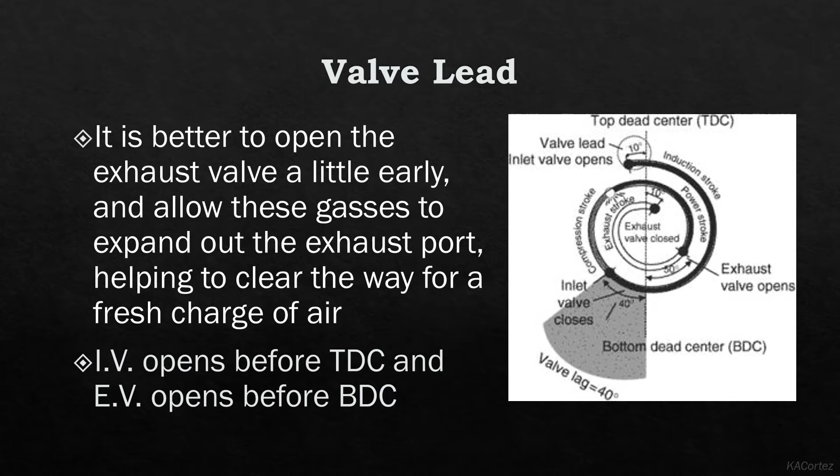The valve lag. Valve lag is the number of degrees of crankshaft rotation after a piston passes the top or bottom center of its stroke, at which the intake or exhaust valve opens or closes. This delay, or the valve lag, enables the momentum of the mixture to add to the weight of the charge, or the momentum of outgoing exhaust gases to pull more exhaust from the cylinder. Therefore, valve lag helps to increase the volumetric efficiency.

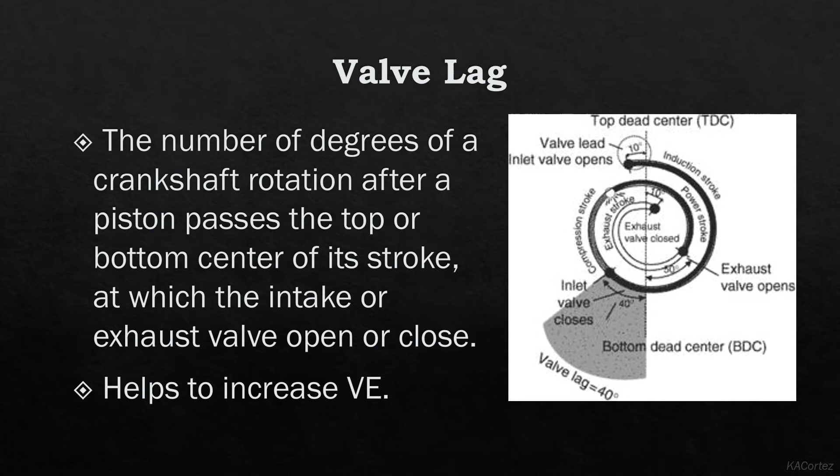Valve overlap. As the engine cycles, there is a period when both the intake and exhaust valves are open at the same time. This timing is known as overlap. Think of this as the exhaust and intake cycles overlapping each other. The valves are timed so the intake valve opens slightly before the piston reaches top dead center on the exhaust stroke. Likewise, the exhaust valve is timed to close just after the piston starts down on the intake stroke. So again, valve overlap occurs when the intake valve and the exhaust valve overlap each other at the same time.

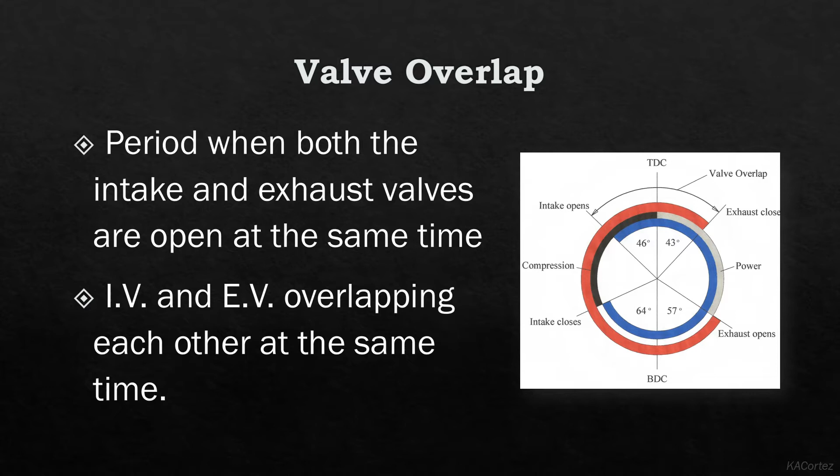The objective of the overlap is for the exhaust gas, which is already running down the exhaust pipe, to create an effect like a siphon and pull a fresh mixture into the combustion chamber. Otherwise, a small amount of burned gases would remain in the combustion chamber and dilute the incoming mixture on the intake stroke. This valve timing is a product of the cam's duration and separation specs.

Firing order. This represents the sequence in which the ignition event occurs in different cylinders. Every engine is designed with a specific firing order to maintain balance and to reduce vibration.

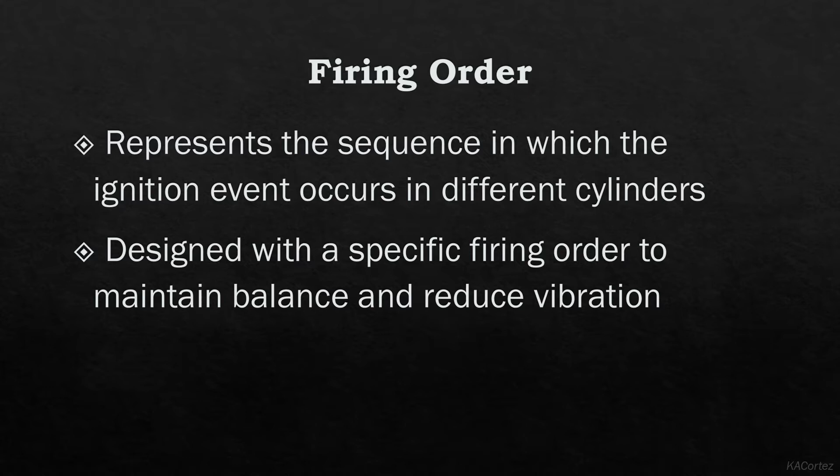For radial engines, the firing order is 1-3-5-2-4. By the way, this is for a 5-cylinder radial engine. For a 7-cylinder, it's 1-3-5-7-2-4-6. And for a 9-cylinder radial engine, it's 1-3-5-7-9-2-4-6-8.

For the inline engine, it's 1-2-3 for a 3-cylinder inline engine, and 1-3-4-2 for a 4-cylinder inline engine. And 1-5-3-6-2-4 for the 6-cylinder inline engine.

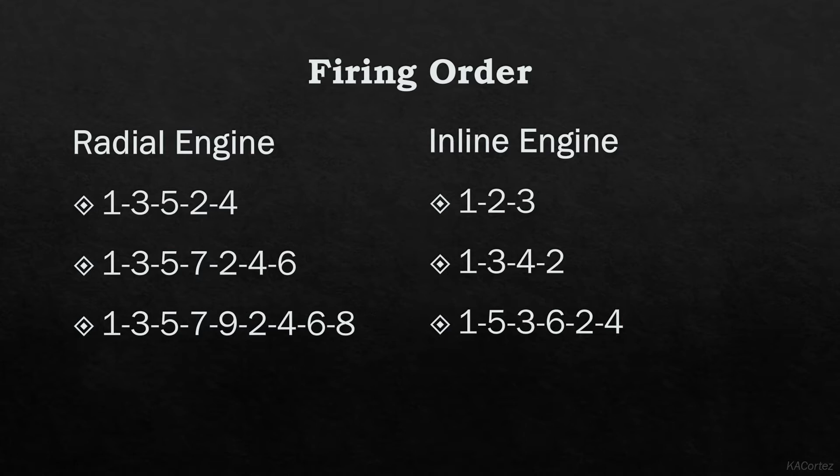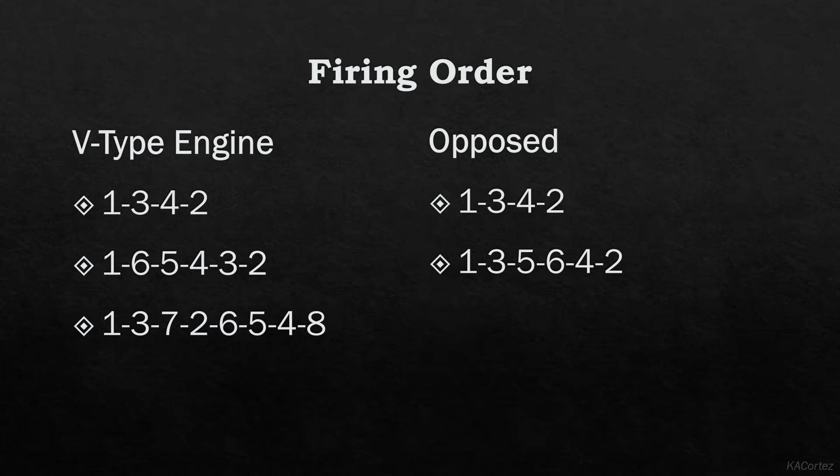For the V-type engine, that's 1-3-4-2 for a 4-cylinder V-type engine. And 1-3-7-2-6-5-4-8 for an 8-cylinder V-type engine. Last is the opposed. For an opposed engine, the firing order is 1-3-4-2 for a 4-cylinder, or 1-3-5-6-4-2 for the 6-cylinder opposed engine.

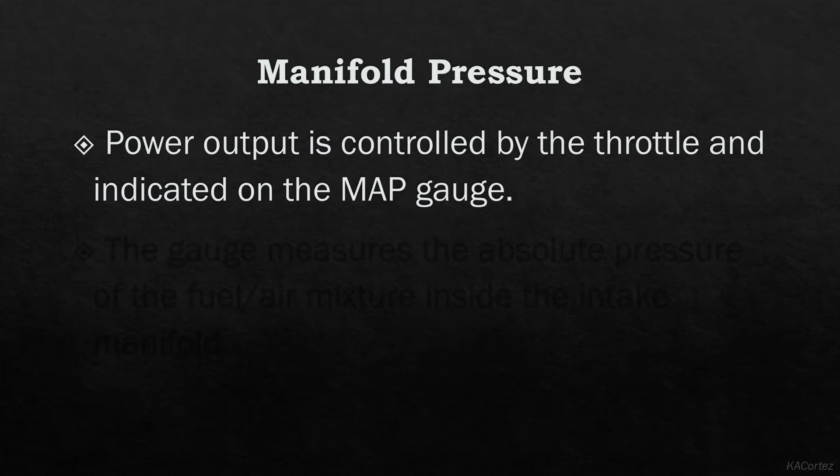Manifold pressure. Power output is controlled by the throttle and it is indicated in the manifold pressure gauge. The gauge measures the absolute pressure of the fuel-air mixture inside the intake manifold. An increase in the throttle setting draws in more fuel-air flowing to the engine, and the manifold pressure increases. It is also important to remember that a given RPM should not exceed its manifold pressure.

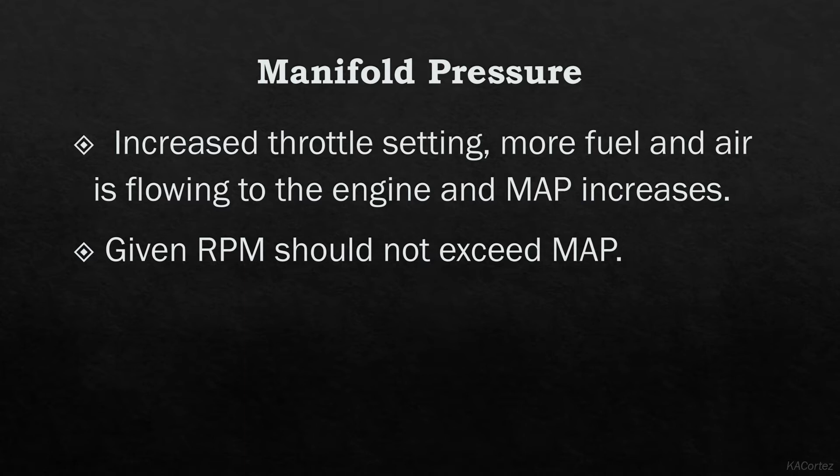Fuel-air ratio. For a rich mixture, the ratio is 8 parts of air to 1 part of fuel. The lean mixture is 20 to 1. And the stoichiometric ratio, or the ideal ratio, is 15 to 1.

Also, fuel-air mixture is controlled by the mixture knob or lever.

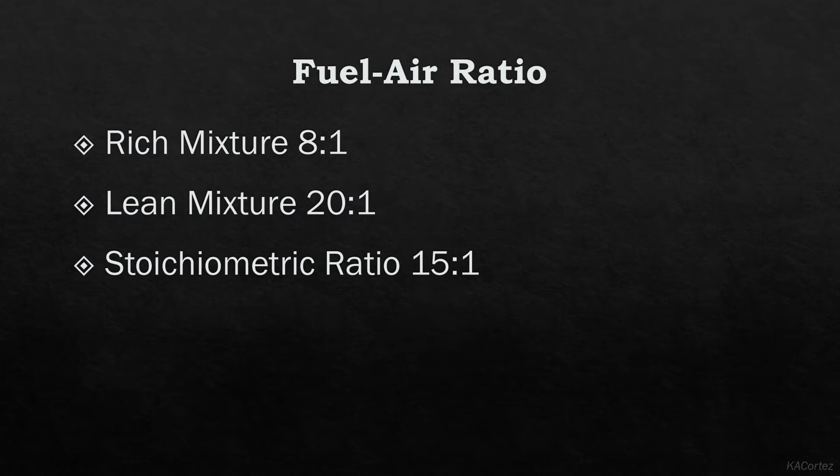Here are some fuel-related problems. Fuel tanks contain moisture that condenses when the outside air temperature cools. As a solution, empty the space inside the fuel tanks that contains this moisture, or refill the fuel tanks to full levels at the end of each day. Condensation occurs when the outside air temperature cools, so this happens at night when the air is much cooler than the land.

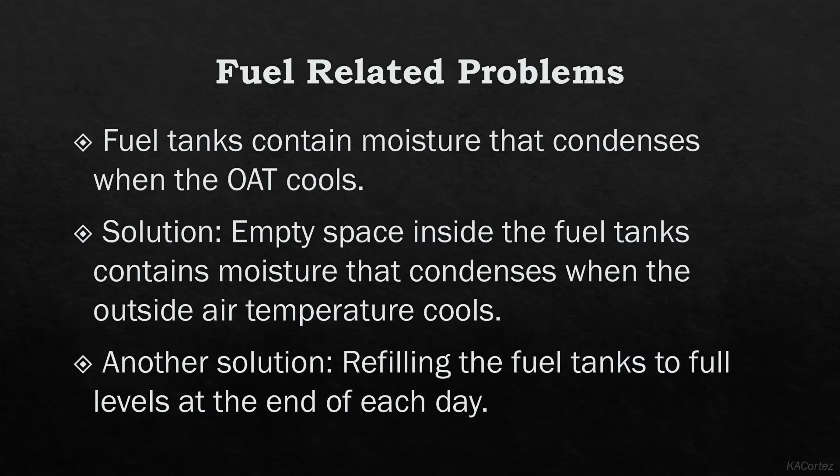Another fuel-related problem is pre-ignition. This is caused by the premature burning of the residual hot spot in the cylinder, which is often created by a small carbon deposit on the spark plug. This is also caused by using a lower than prescribed octane rating. So this is pre-ignition.

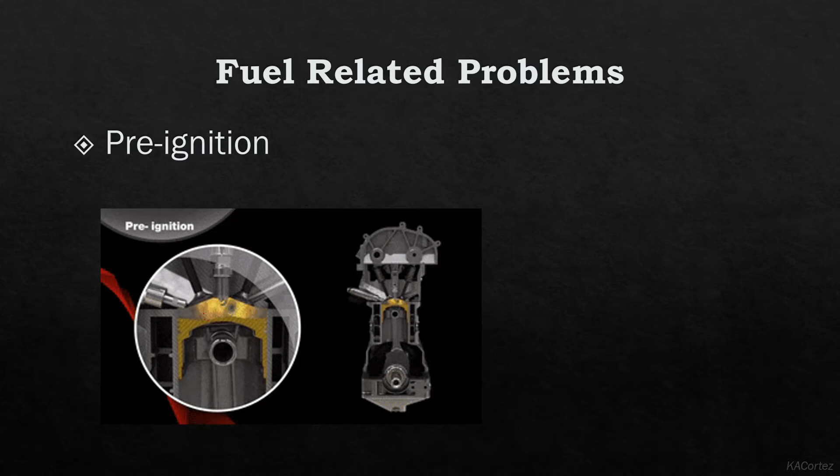Detonation is the uncontrolled explosive ignition of the fuel-air mixture within the cylinder's combustion chamber. Here are some causes of detonation: the use of lower fuel grade than that specified by the aircraft manufacturer, and operation of the engine with extremely high manifold pressures in conjunction with low RPM.

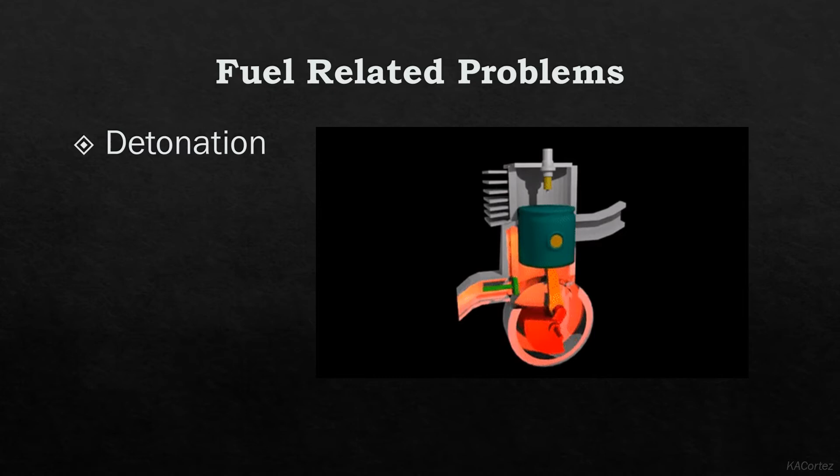Also, operation of the engine at high power settings with an excessively lean mixture. And last is maintaining extended ground operations or steep climbs in which cylinder cooling is reduced.

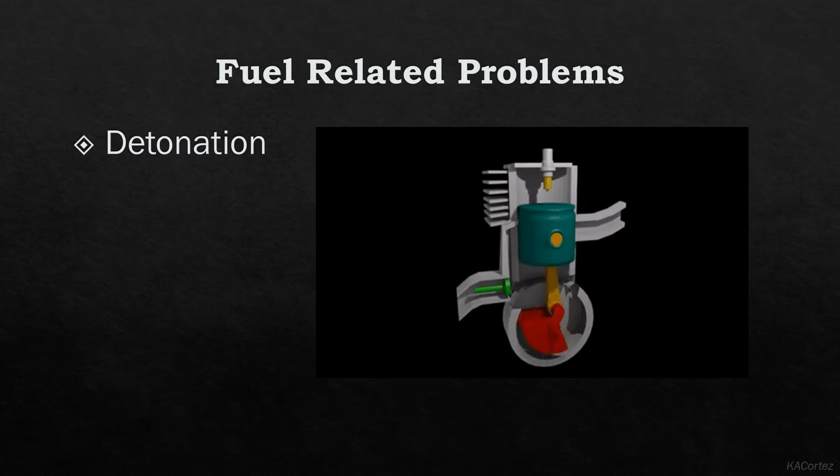How do we avoid detonation? Keep the cowl flaps open on the ground. Use the proper grade of fuel as prescribed by the OEM. Use a rich fuel setting during takeoff and initial climb. And avoid high power and steep climbs.

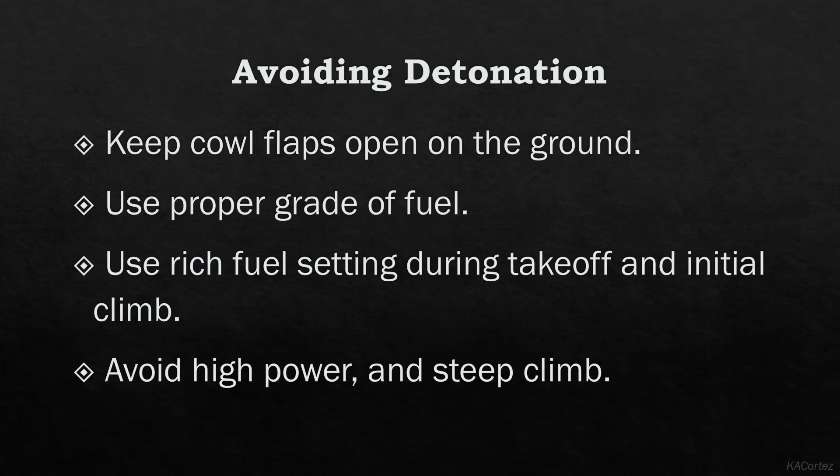Usually, mixture is leaned when the density of the air is lesser, or gets thinner. Pilots would start leaning the mixture at 3,000 feet.

So here are some benefits of a properly leaned mixture. It gives better engine performance. With the right amount of fuel-air mixture, the engine will produce the right amount of torque needed for a propeller to be efficient during flight. And last is fuel efficiency.

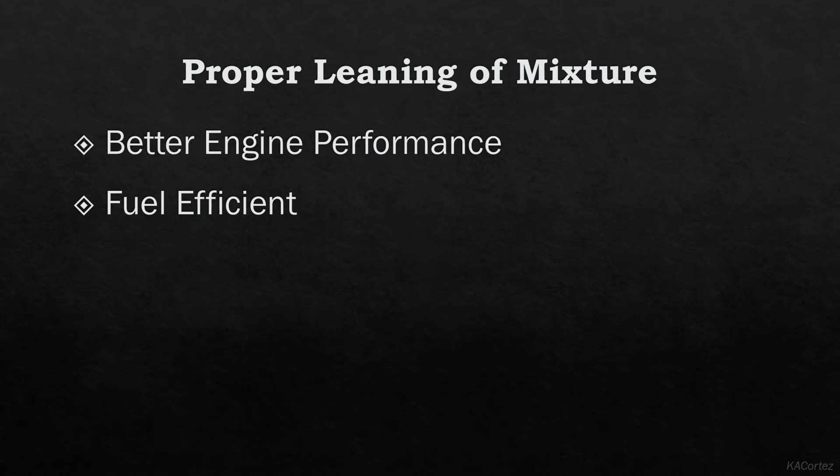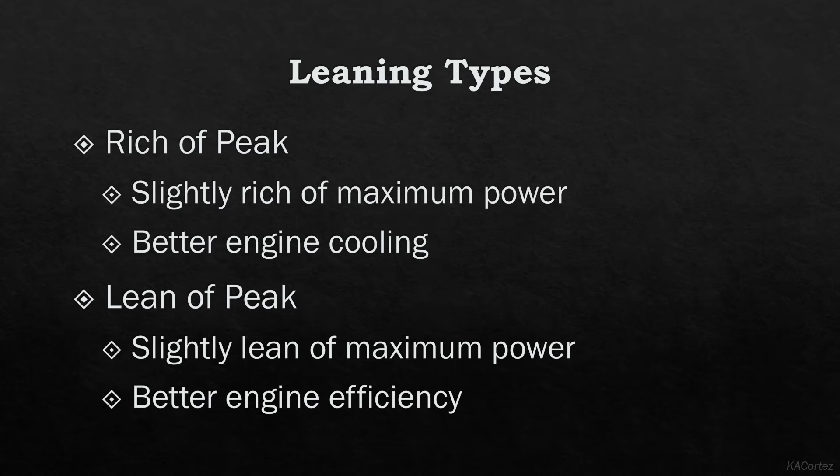Leaning types: there are two leaning types, the rich of peak and the lean of peak. The rich of peak has a slightly rich of maximum power and gives off better engine cooling, while the lean of peak has a slightly lean of maximum power and better engine efficiency.

Improperly leaned engines have a serious effect on an aircraft's operation. Let's take a look at the two conditions for improperly leaned engines. First is a mixture that is too lean. This will cause the engine to have higher temperatures, therefore a lower engine output, and the engine will experience roughness and could cause detonation and pre-ignition.

While for the mixture that is too rich, the engine will have a lower engine output, higher fuel consumption, and possibly spark plug fouling.

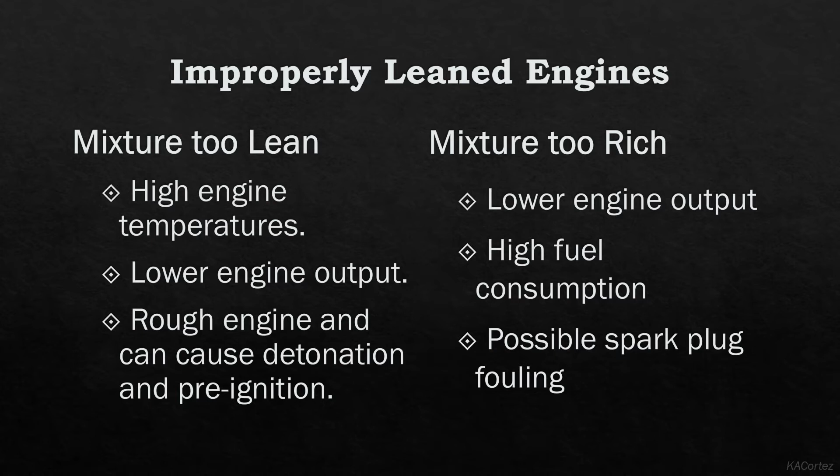If an aircraft is not fuel injected, it is carburetor equipped. The carburetor is a component of the induction system where fuel and air is mixed before it enters the intake manifold. Because of this, it is susceptible to icing, also known as carb ice or carburetor ice.

When fuel and air enter the carburetor, a low pressure area is created at the venturi and/or the throttle valve. This causes a sudden drop in temperature that could lead to icing conditions.

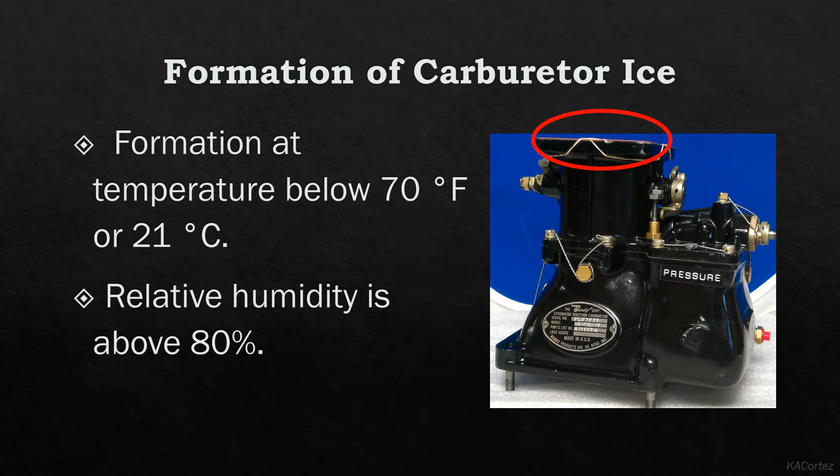Here are some of the conditions in which icing may occur: formation at temperatures below 70 degrees Fahrenheit or 21 degrees Celsius, and a relative humidity above 80%.

The detection of carburetor ice is quite difficult. However, there are some indications in the aircraft. One is the engine's roughness in a fixed pitch propeller. The second is reduced manifold pressure, but there is no indication in the reduction of RPM.

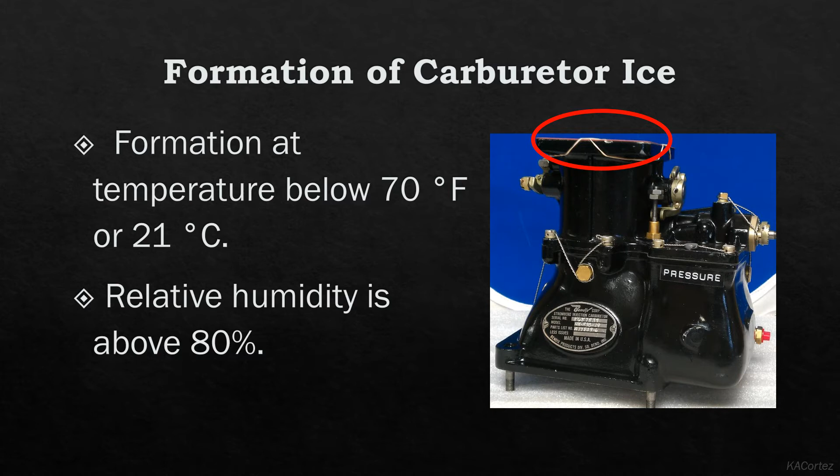Functions of the carburetor heat: first, it preheats air, therefore it prevents the formation of carburetor ice. And last, the hot air makes the mixture richer since the hot air is less dense.

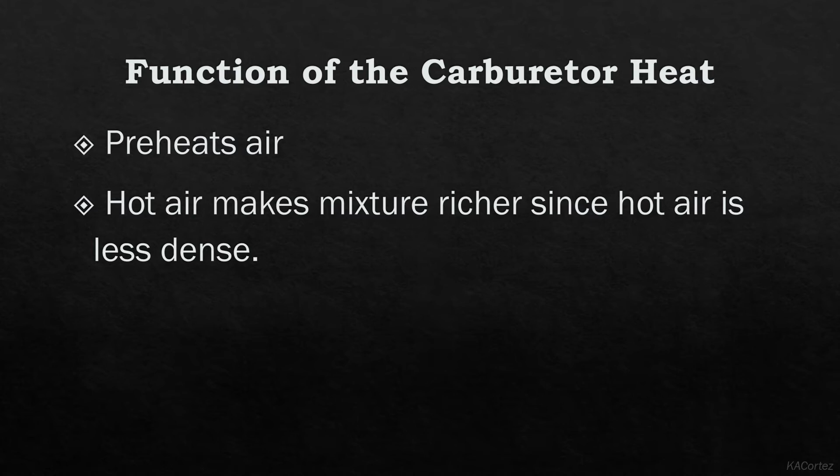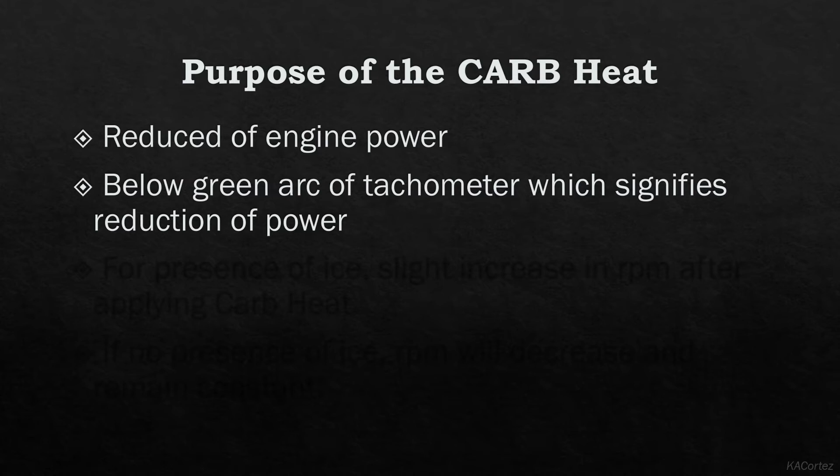The carb heat is also important during aircraft operations. It helps to reduce the engine power. It is used below the green arc of the tachometer, which signifies the reduction of power. For the presence of ice, there will be a slight increase in RPM after applying carb heat. And if there is no presence of ice, RPM will decrease and remain constant.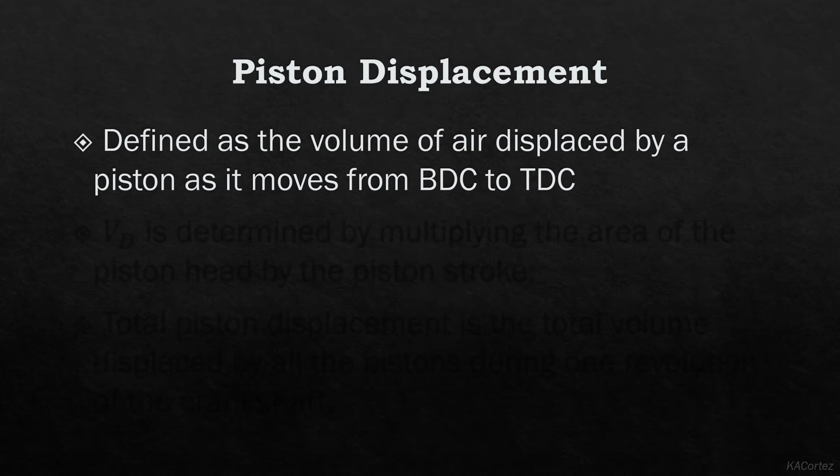Piston displacement is defined as the volume of air displaced by a piston as it moves from the bottom dead center to the top dead center. Piston displacement is referred to as VD. This is determined by multiplying the area of the piston head by the piston stroke.

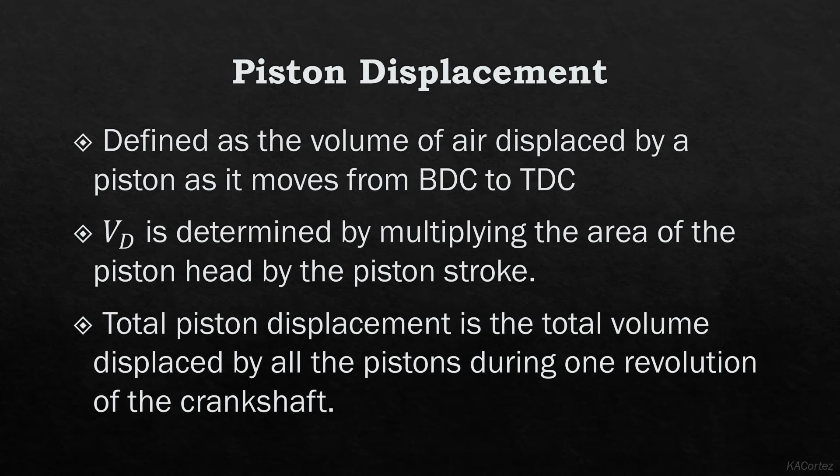Total piston displacement is the total volume displaced by all the pistons during one revolution of the crankshaft. It also equals the number of cylinders in the engine multiplied by the piston displacement of one piston. So the greater the total piston displacement is, the greater is the maximum horsepower that an engine could develop. This is also known as volume displacement.

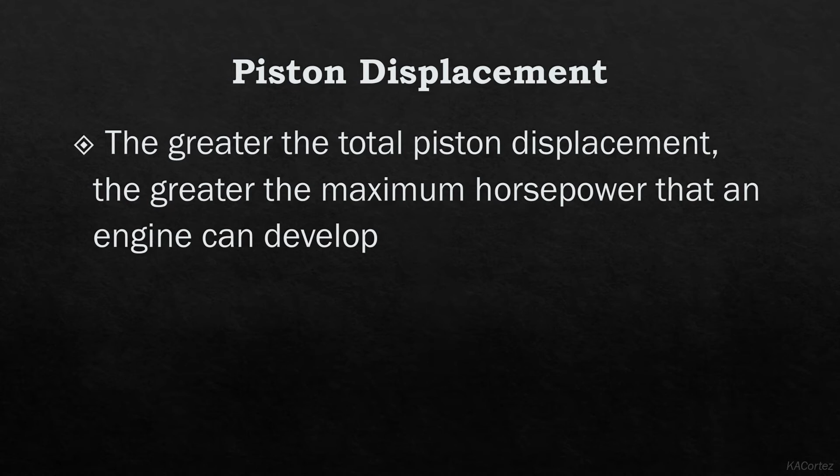The formula for piston displacement is area times length, or the stroke of the piston. However, area is determined with the formula pi r squared, or pi d squared over 4. By the way, r is equal to bore over 2.

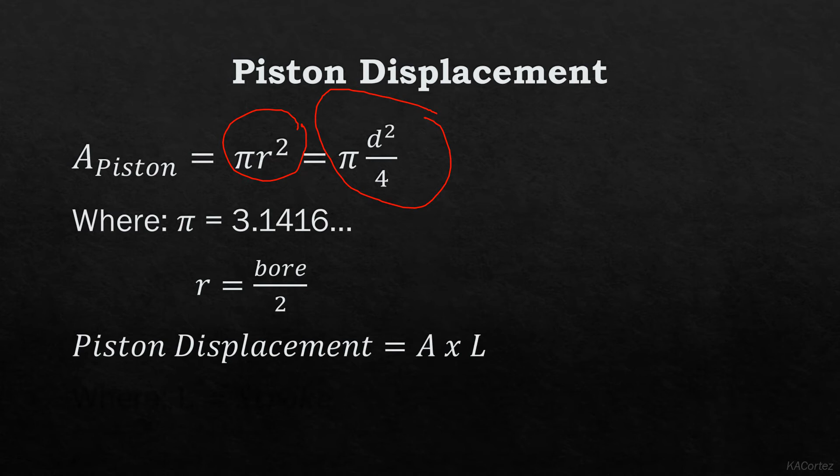And also the total piston displacement: total piston displacement is obtained with the formula area of the bore multiplied by the length of the stroke, times the number of cylinders.

If a bore is too large, fuel is wasted, and the intensity of the heat and the restricted flow of the heat may be so great that the cylinder may not be cooled properly. On the other hand, if a stroke is too large, there will be excessive dynamic stress, and too much angularity of the connecting rods will be the consequence.

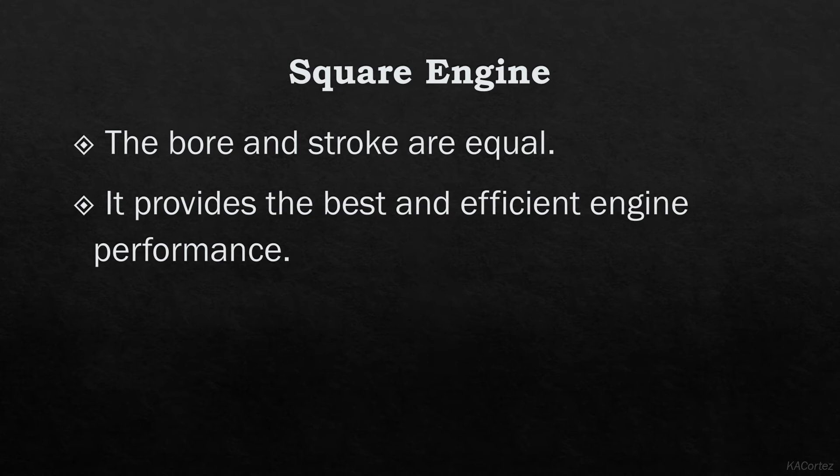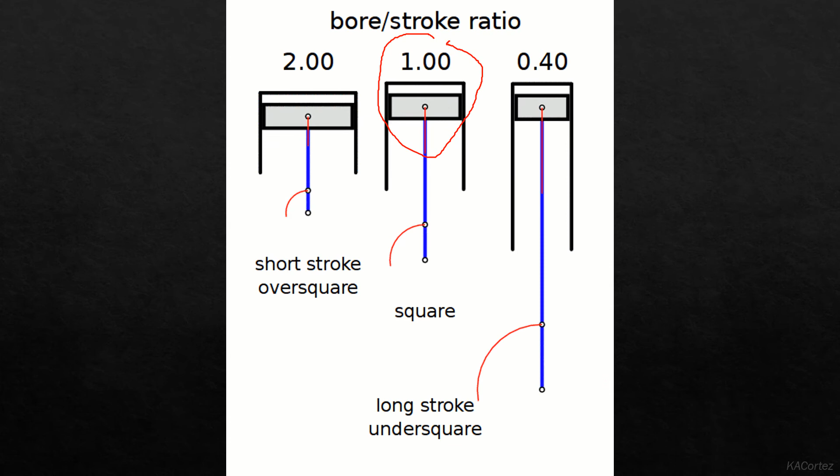A square engine has its bore and stroke equal. It provides the best and efficient engine performance. Here you can see an illustration of the square engine. So the proportion of the bore and the stroke has an effect on the engine's efficiency. A larger bore may require more fuel, while a larger stroke will result in angularity of the connecting rod.

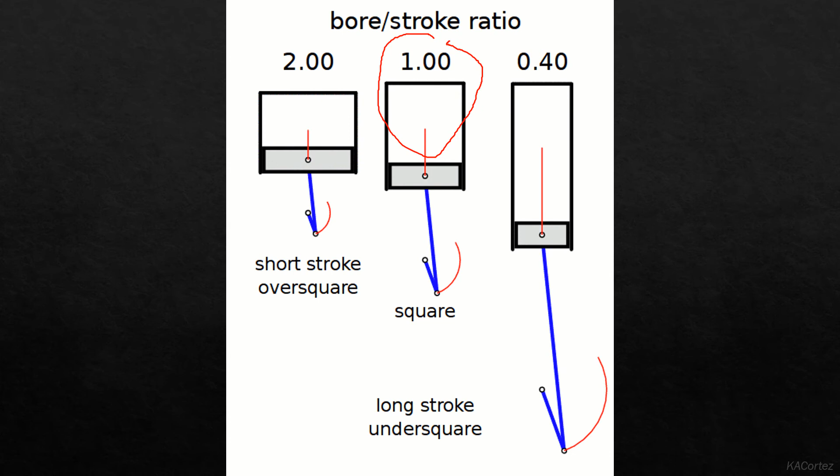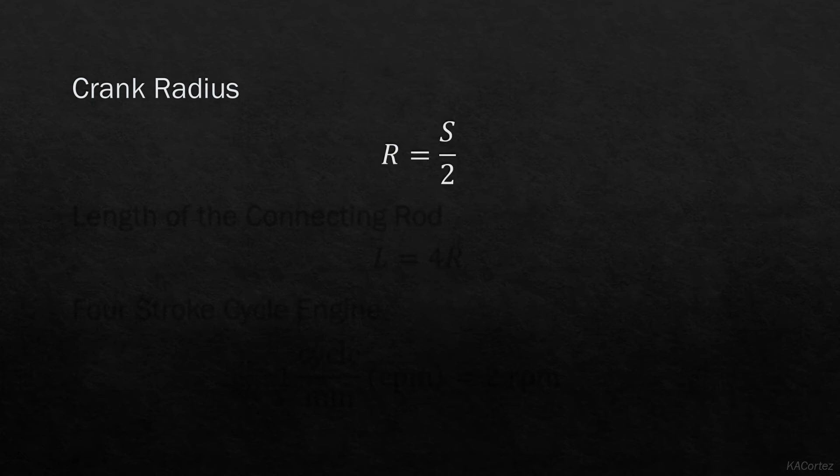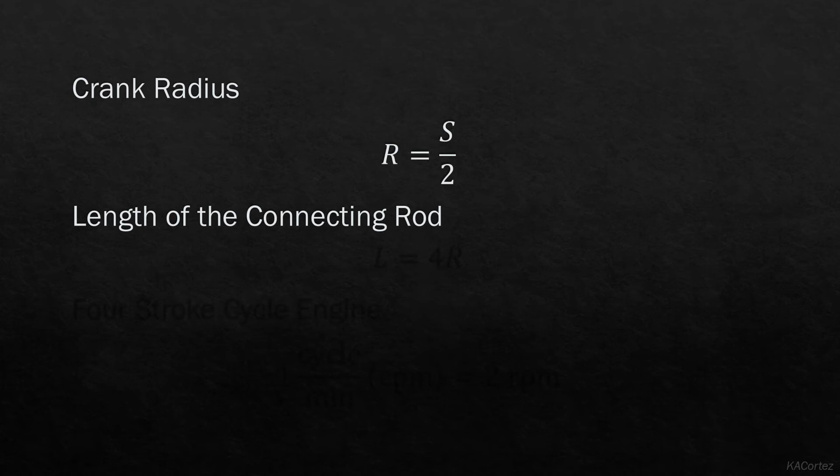Crank radius. Here are some points to remember. Crank radius is solved by using the formula R is equal to S over 2. And also the length of the connecting rod: technically, L is equal to 4R.

For a 4-stroke engine cycle, 1 cycle per minute, or 1 CPM, is equal to 2 revolutions per minute. Again, this is for the 4-stroke cycle engine.

Engine power or horsepower is the maximum power that an engine can put out. It can be expressed in kilowatts or horsepower. The power output also depends on the size and design of the engine, but also on the speed at which it is running and the load or torque.

So here are some ways on how to measure engine power: indicated horsepower, brake horsepower, and friction horsepower.

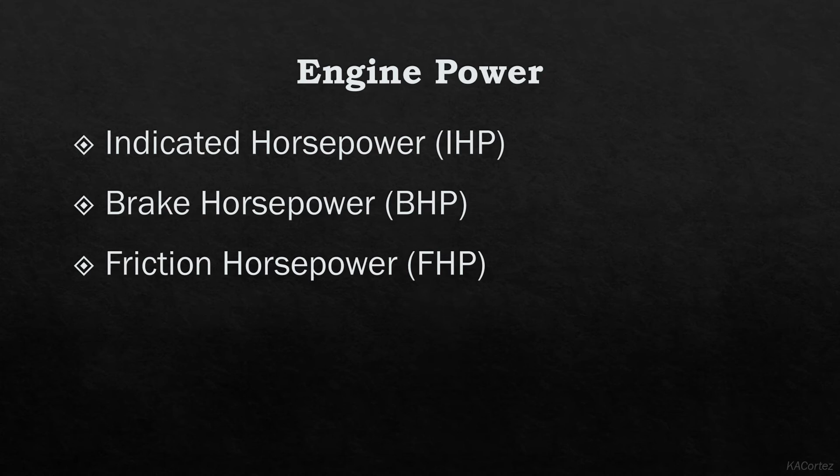Indicated horsepower, or IHP, is the total power actually developed in an engine's cylinders without reference to the friction losses within the engine. So to compute for IHP, the average effective pressure within the cylinders must also be known. This pressure is referred to as the mean effective pressure.

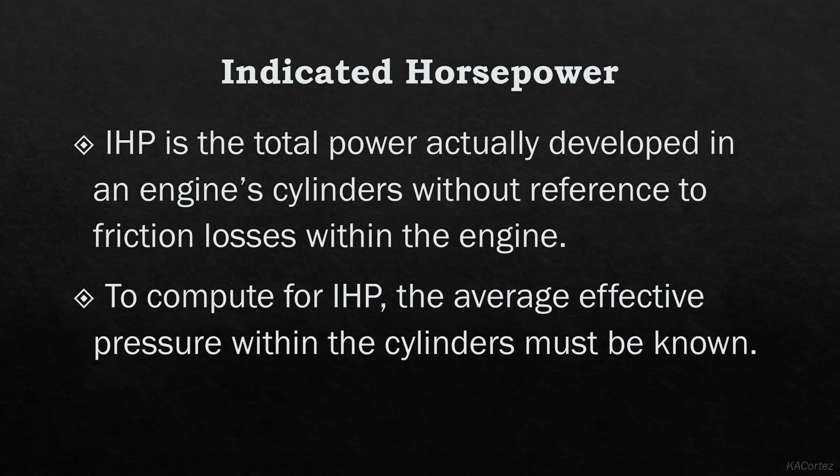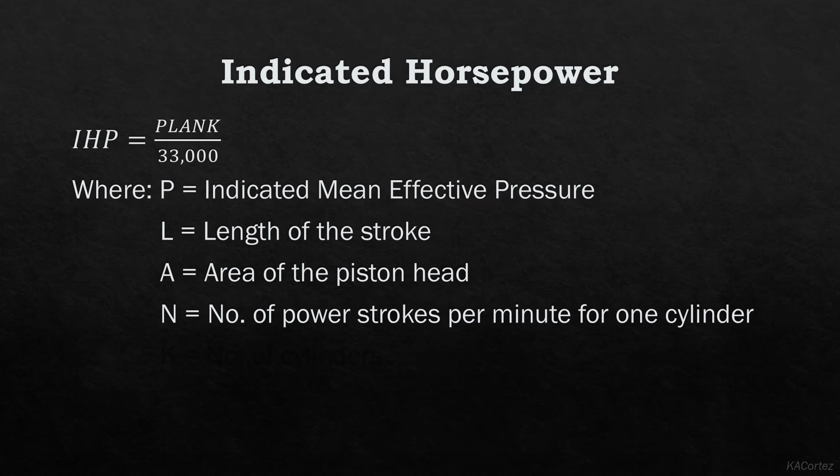IHP is equal to PLANK over 33,000, wherein P is the indicated mean effective pressure, L is the length of the stroke, A is the area of the piston head, N is the number of power strokes per minute of one cylinder, or that is RPM divided by 2, and then K is the number of cylinders.

Friction horsepower: this is the power required to overcome the friction and energy losses. This is referred to as friction horsepower, or FHP. It is measured by driving an engine with a calibrated motor and measuring the power needed to turn the engine at a given speed.

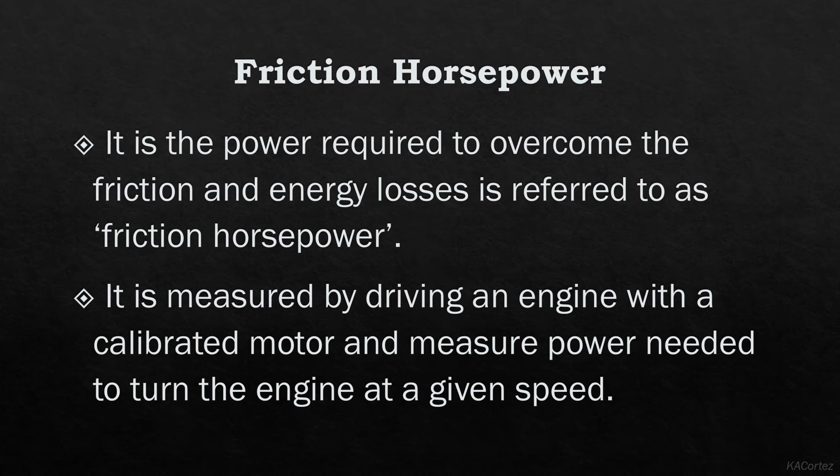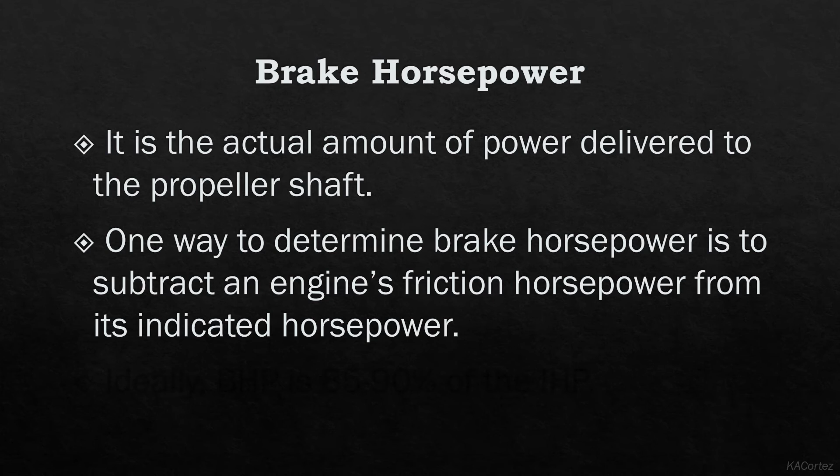Brake horsepower: it is the actual amount of power delivered to the propeller shaft. One way to determine BHP is to subtract an engine's friction horsepower from its indicated horsepower. Ideally, brake horsepower is 85 to 90% of the IHP.

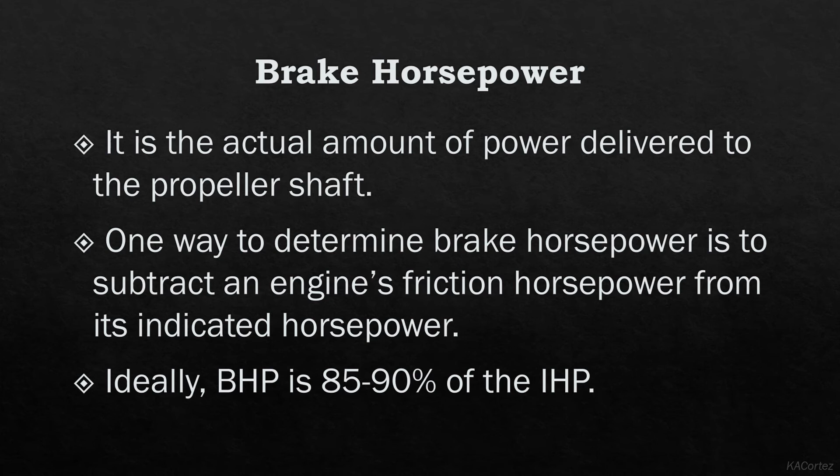The formula for IHP is BHP plus FHP.

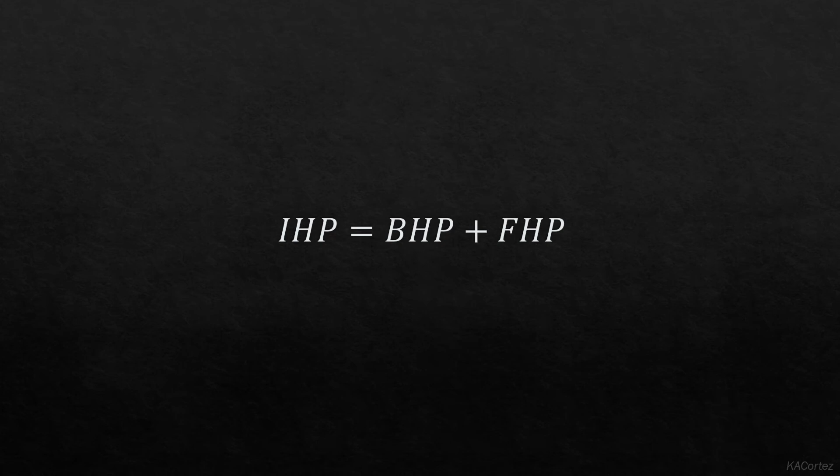Mean effective pressure is the average pressure inside the cylinders of an internal combustion engine. It is based on some calculated and measured horsepower. It increases as manifold pressure increases.

There are two types of mean effective pressure: indicated mean effective pressure, or IMEP, and brake mean effective pressure, or BMEP. IMEP is the mean effective pressure calculated with indicated power. This parameter does not take into account the efficiency of the engine, while brake mean effective pressure is the mean effective pressure calculated from the dynamometer power. Brake mean effective pressure is a calculation of the engine cylinder pressure that would give the measured brake horsepower. It is an indication of the engine's efficiency regardless of the capacity or engine speed.

IMEP is derived from the indicated horsepower. It is computed with the formula: BMEP take-off over the mechanical efficiency.

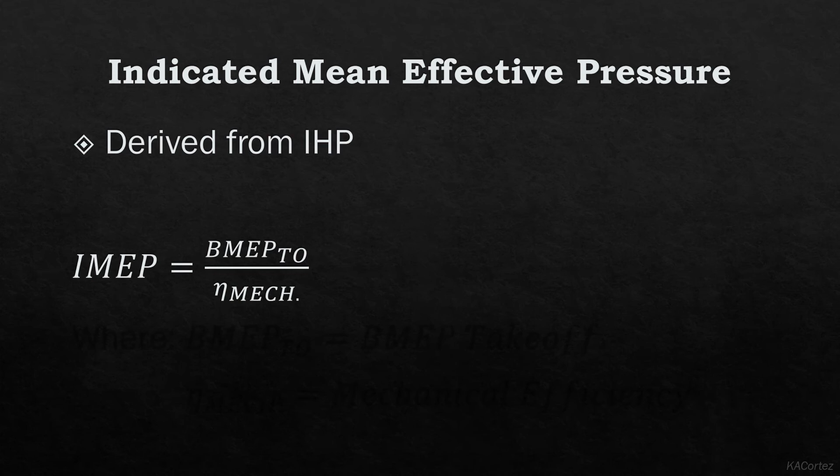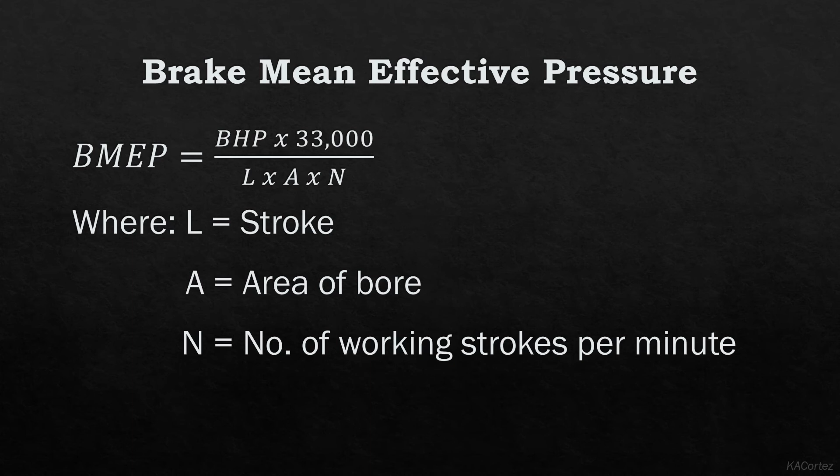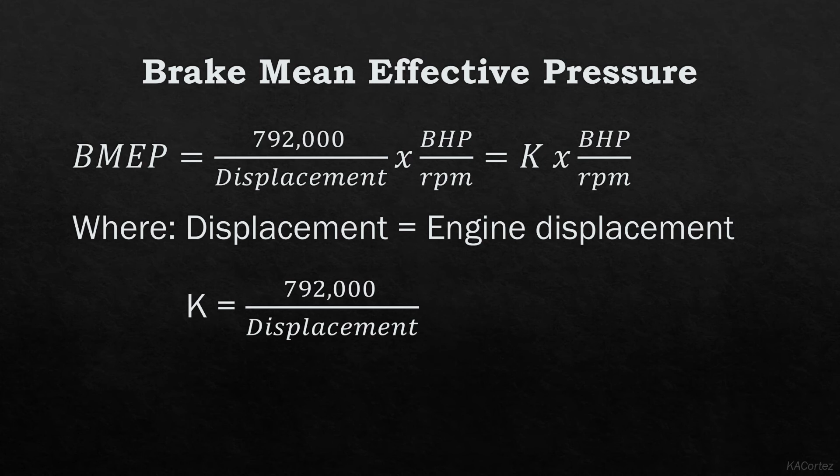Brake mean effective pressure is computed with the formula BHP times 33,000 over L times A times N. Also, we can use the formula 792,000 over displacement, times brake horsepower over RPM, or the formula K times BHP over RPM. Displacement is the engine displacement, and K is equal to 792,000 over displacement.

Brake mean effective pressure at take-off: to compute for brake mean effective pressure at take-off, the formula is brake horsepower at take-off multiplied by RPM at cruising, all over brake horsepower at cruising multiplied by BMEP at cruising over RPM at take-off.

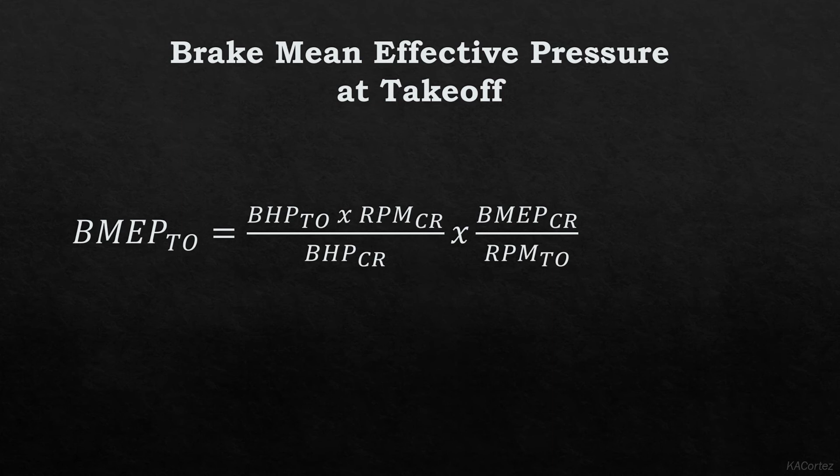Engine efficiency is the ratio of the output energy to the input energy - the energy supplied to produce work and the actual energy being converted into work. Engine efficiency is measured in several ways. It tells you how reliable an engine is. It is measured through thermal efficiency, volumetric efficiency, and mechanical efficiency.

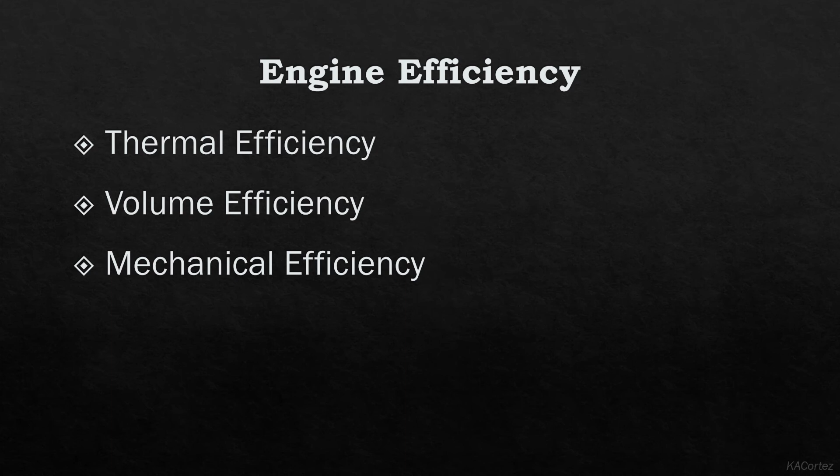Thermal efficiency is a ratio of the amount of heat energy converted to useful work to the amount of heat energy contained in the fuel used to support combustion. An example of this is two engines that produce the same amount of horsepower but consume different amounts of fuel. The engine using less fuel converts a greater portion of the available energy into useful work, and therefore has higher thermal efficiency. The measure of the inefficiencies experienced when converting the heat energy in fuel to work is also thermal efficiency.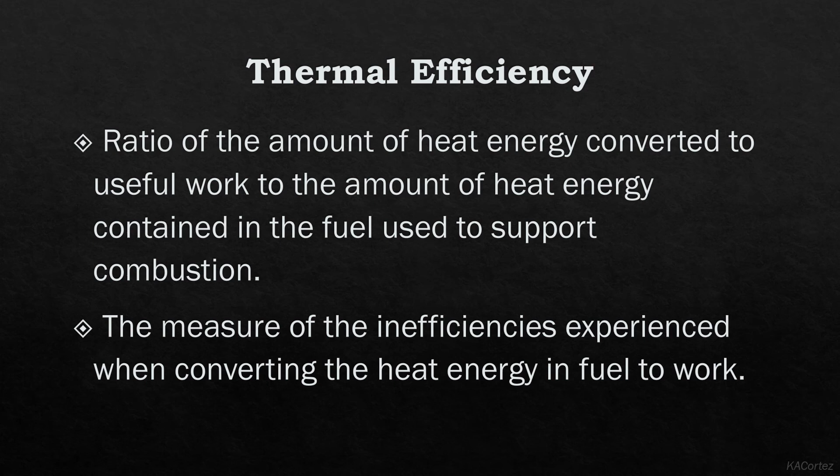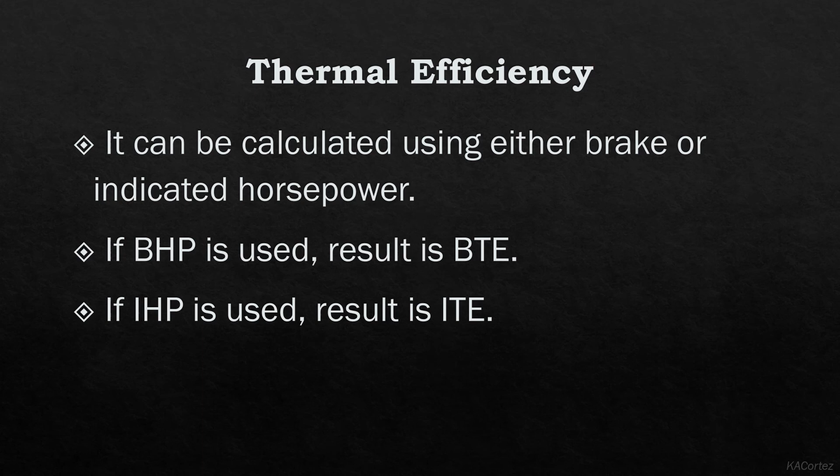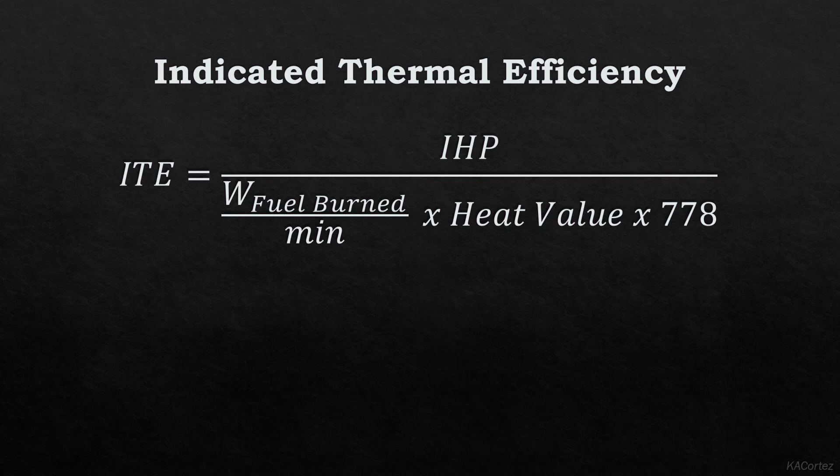Thermal efficiency can be calculated using either brake or indicated horsepower. If BHP is used, the result is brake thermal efficiency. If IHP is used, the result is indicated thermal efficiency. Indicated thermal efficiency is solved with the formula ITE equals IHP over the weight of the fuel burned per minute times the heat value times 778.

Brake thermal efficiency is computed with the formula BTE equals BHP times 33,000 all over the weight of the fuel burned per minute times the heat value multiplied by 778.

Volumetric efficiency is the ratio of the volume of fuel and air an engine takes into its cylinders to the total piston displacement. For example, if an engine draws in a volume of fuel and air that is exactly equal to the engine's total piston displacement, volumetric efficiency would be 100%. VE of most normally aspirated engines is less than 100%.

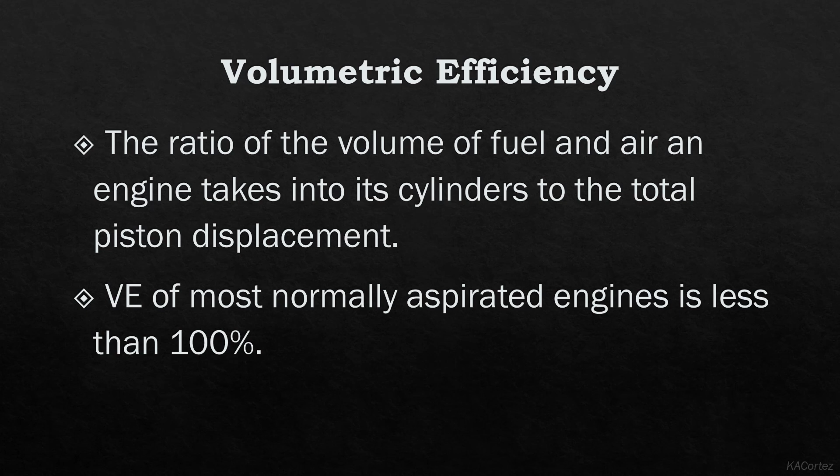The reason for this is because bends, surface roughness, and obstructions inside the induction system slow the flow of air, which in turn reduces the air pressure within the manifold. Some turbocharged engines compress air before it enters the cylinders and often have VE greater than 100%.

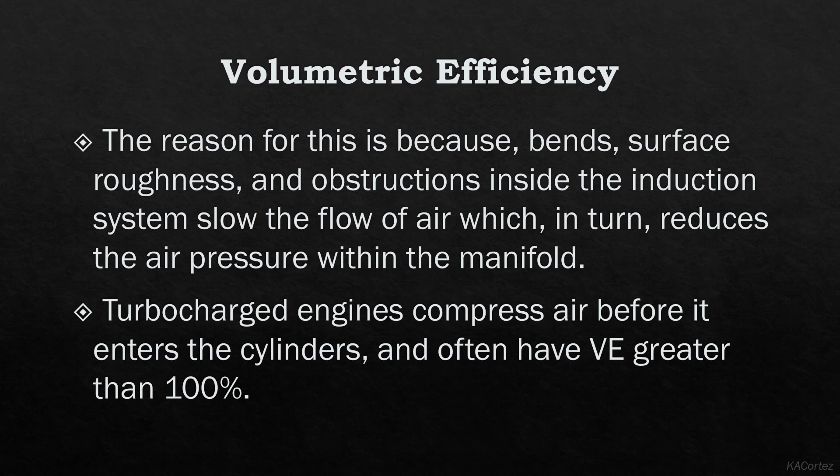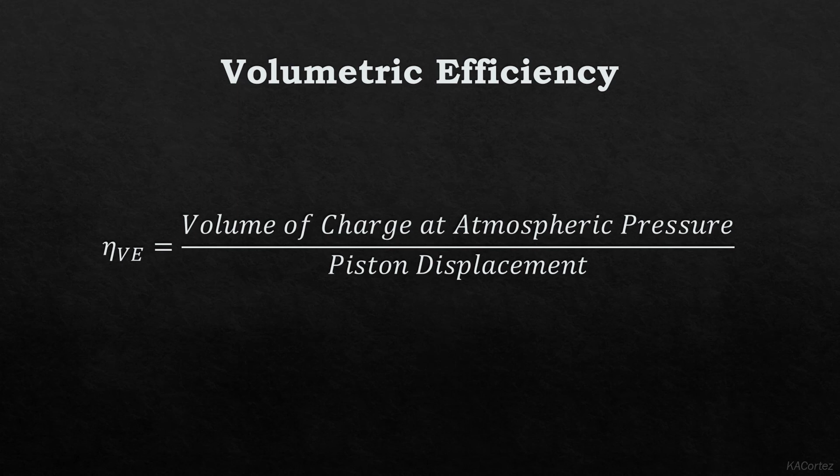Volumetric efficiency equals the volume of charge at atmospheric pressure over piston displacement.

Here are some factors affecting volumetric efficiency: part throttle operation, long small diameter intake pipes, induction systems with sharp bends, high carburetor air temperature, high cylinder head temperatures, incomplete scavenging, improper valve timing, and increase in altitude.

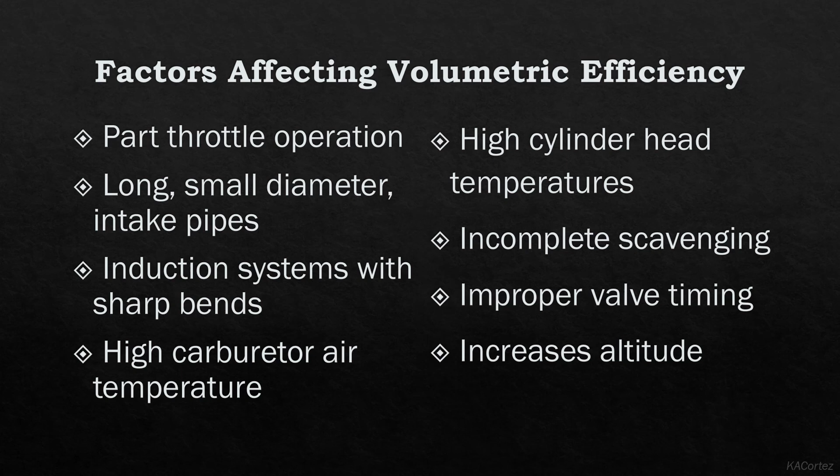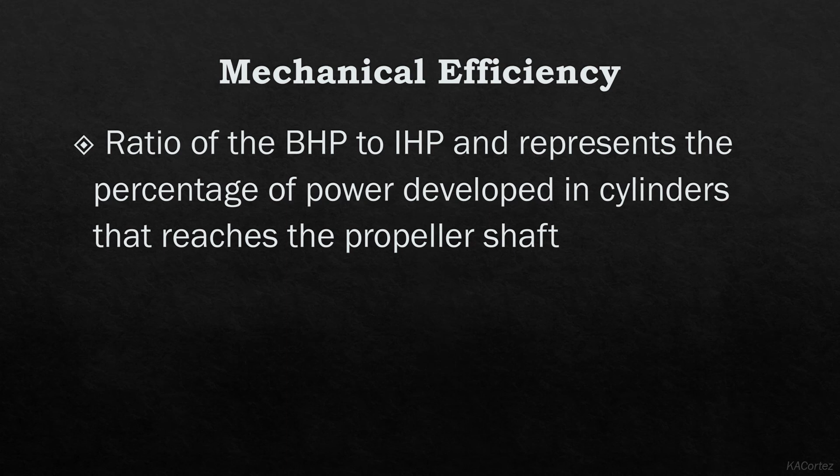Mechanical efficiency is the ratio of the BHP to IHP. This represents the percentage of power developed in the cylinders that reaches the propeller shaft. Mechanical efficiency is computed with the formula output over input, or simply BHP over IHP.